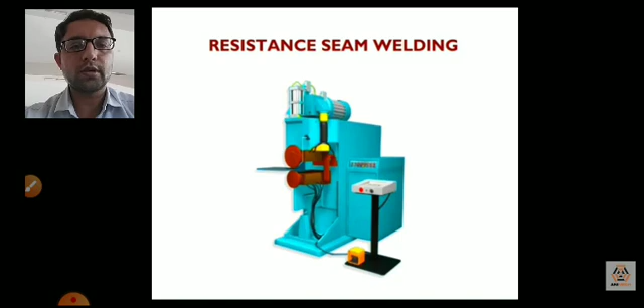Let me explain what happens in seam welding. There are simple two plates, whenever we want to join two plates. Between the two plates there is also a vertical movement, which is helpful to bring the electrode rod to the nearest place.

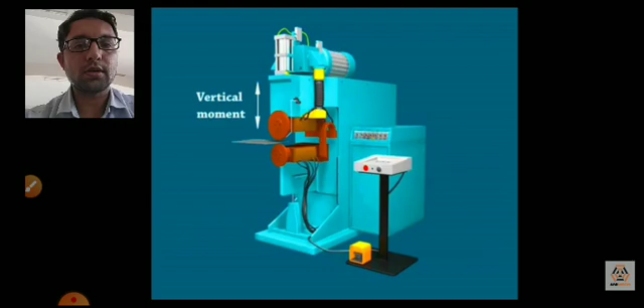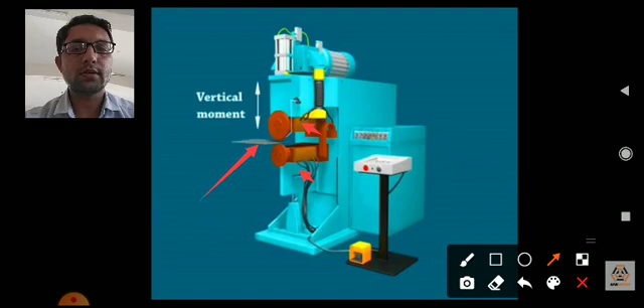So these are the electrode rods. If you see here, there are two electrode rods. In the next slide it will show the complete larger picture. There is an electrode rod, and in that there will be two workpieces placed. There is also a water tube which is helpful to reduce the heat generated, or to maintain the temperature between the two plates.

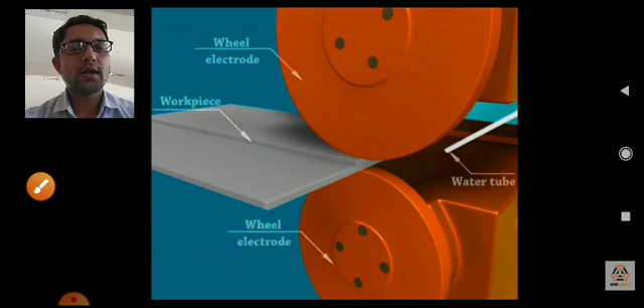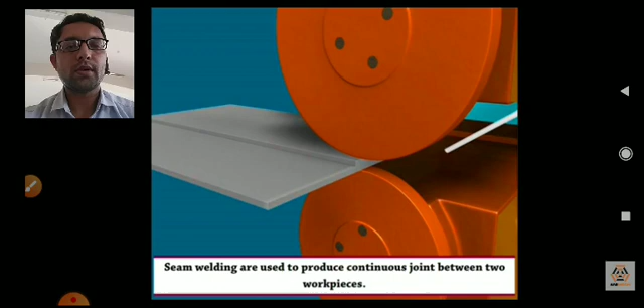Seam welding is generally used to produce a continuous joint between two workpieces, as we have already discussed. There are two rollers, and we pass current between the two electrodes, and because of the rollers this whole seam welding continues. Let me show the next slide.

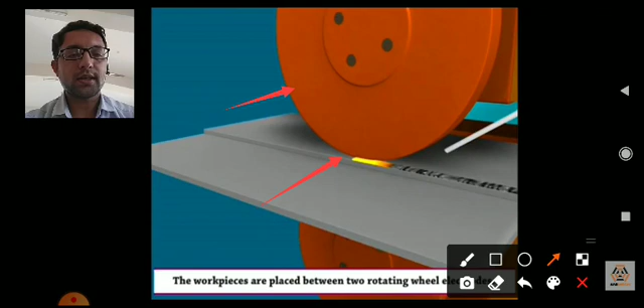Now see here what happens: current starts in these two rollers. One is connected to positive, the other to negative, and both rollers rotate, and because of that the two plates continuously run and get joined. So the heat that is generated is shown here, and the welding that is done can be seen with the help of this picture.

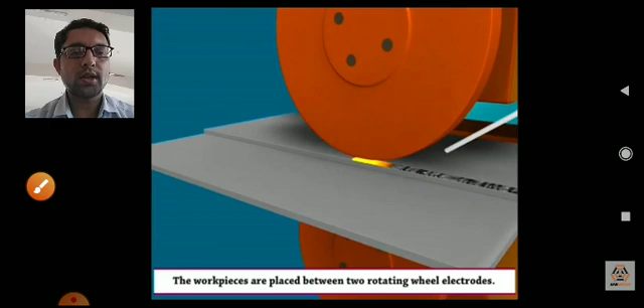The workpiece is placed between the two rotating wheels of the electrode, and when electric current is passed through the electrode, high heat is produced on the workpiece between the wheels. Force is also produced, and hydraulic and mechanical pressure is generated because of the roller movement, along with heat generated between the two workpieces. Because of that, a welding joint is formed.

So it's a very simple process. As compared to spot welding, here we get a continuous joint.

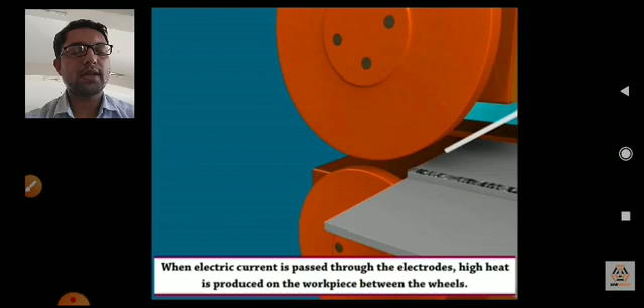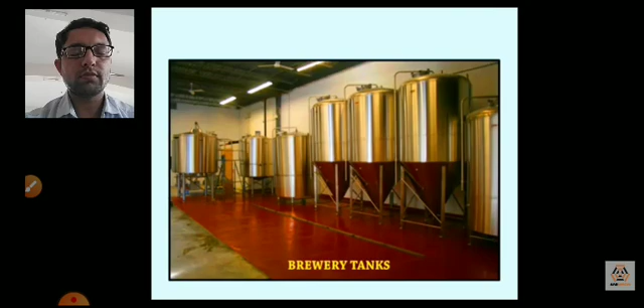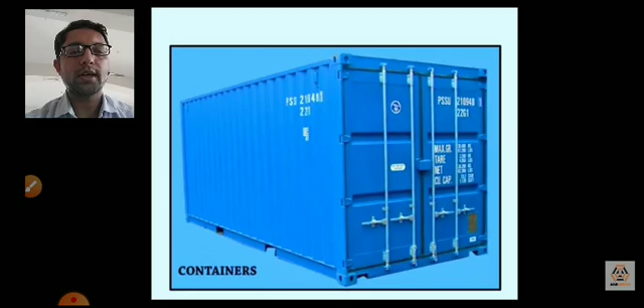These are some applications of seam resistance welding. For example, tankers, called brewery tanks, are joined with the help of seam welding. Then containers, which you have already seen at so many places, are also joined with the help of seam welding. Then heat exchangers, and motor cases, wherever the joint requires a continuous joint.

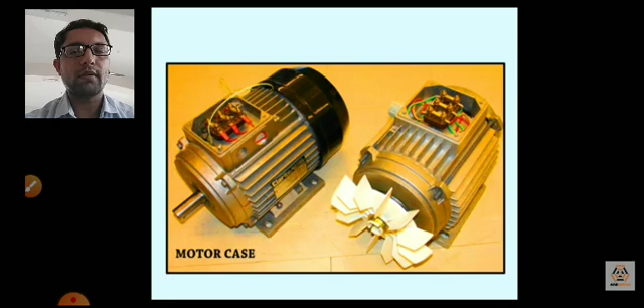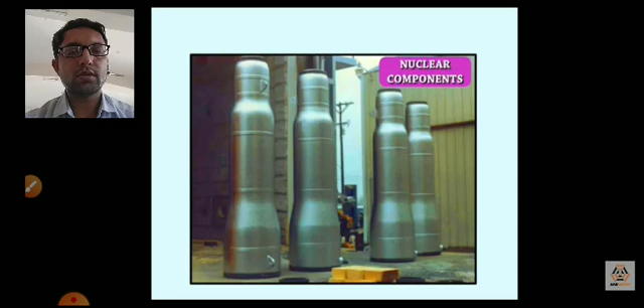For that we use seam welding. Nuclear components, these are all roller types of components, and they always require continuous joint, because we can't stop welding at one place when we don't require any spot there. For continuous joints, there is a huge demand for seam welding as compared to spot welding. Especially pressure vessels are useful to join with seam welding.